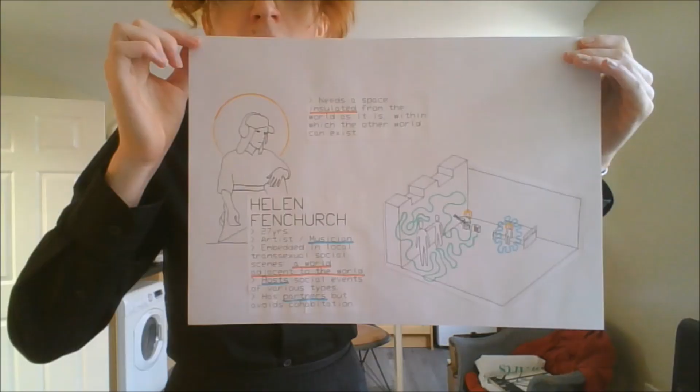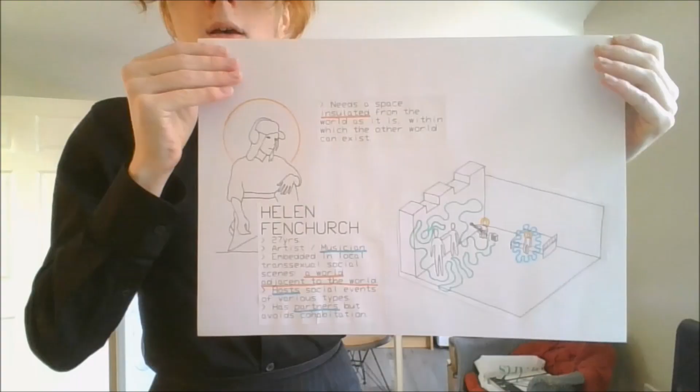It was to this end that I devised Helen Fenchurch, an amalgamation of cool transgender women that I know, and very probably including almost everyone seeing this footage. A 27-year-old musician. She needs her own space, and also needs enough room to host events. Considering the off-kilter nature of her social circles by conventional standards, a house for Helen Fenchurch needs a certain degree of insularity from the world around it, such that it provides an environment capable of hosting the alternative world within.

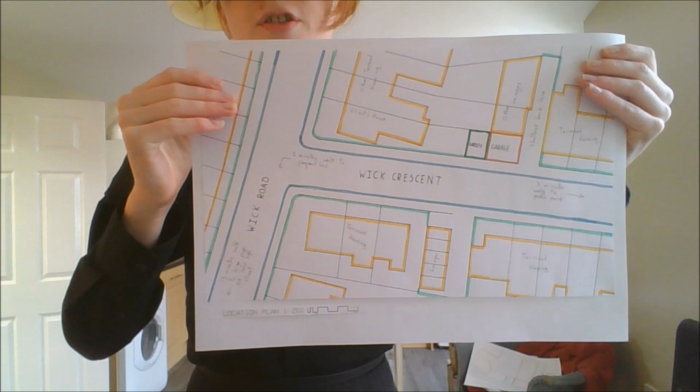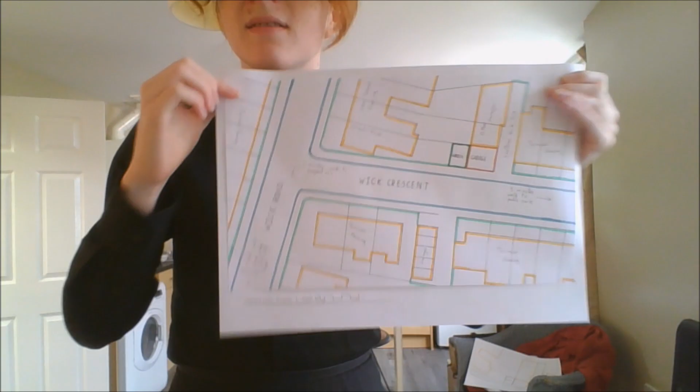The garage, shown in red, opens onto a back lane. It is also attached to a small area of garden, highlighted in dark green. It's 3 minutes walk to a park, 3 minutes walk to a bus stop, and from that bus stop, about half an hour in total to the centre of town. It's also 13 minutes walk to a large supermarket via a local high street with local shops. Rather pleasant.

A closer view of the site gives us a sense as to what's around it. The buildings directly adjacent to the garage are other garages. The other buildings, shown in yellow, are 2-storey terraced houses.

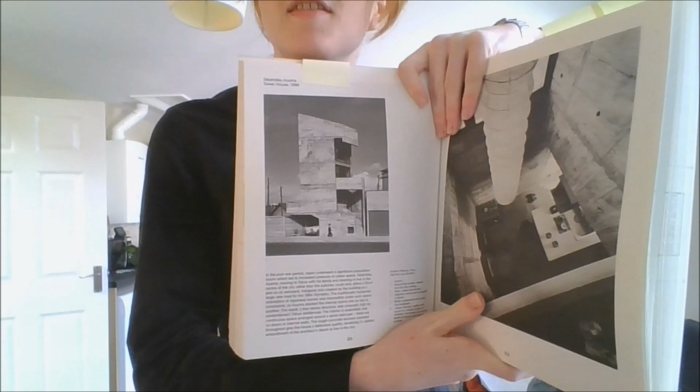With knowledge of the site, the user, and her needs, we must now hit the books and consider references. This is The Japanese House, Architecture and Life After 1945, a beloved tome of mine. Within this book we find Takamitsu Azuma's 1966 Tower House, Toyo Ito's 1976 White U, and Osamu Ishiyama's 1995 Light Coffin.

Tower House deals with its small site and overlooked surroundings by building upwards to create a sort of visual fortification against the city around it. White U looks only inwards with no external windows, onto a central corridor floored in dark earth, representing the grief of its planned occupant. Light Coffin is also a windowless space, with only skylights coming from above, with the appearance of a sort of distorted industrial shed. It was designed for a gay couple.

Besides these, I also considered Ted Cullinan's 1963 self-built house at 62 Camden Mews in London, the ground floor of which has high brick walls with clerestory windows above, that is, windows that are horizontal but above eye level, so you can only see the sky out of them. They let natural light in. This space, despite only being lit by clerestory windows and having no eye-level view outwards, was perfectly comfortable to stay within.

From these lessons, we can say that we can take advantage of our small site by increasing the height of our building, creating a level of visual fortification to prevent overlooking, and otherwise create a sort of insulated interior environment with the effect of something like fortification.

But on our small site, there isn't enough room for introspection towards a courtyard, as to put a courtyard through the middle of the building would leave a tiny donut of space around it. So, how can we create a courtyard without surrounding it?

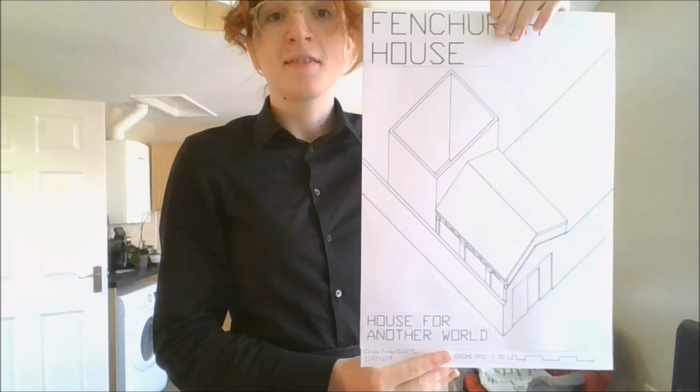Combining these lessons, we have Fenchurch House, or the house for another world. Here is the shaft, where the light comes down from above.

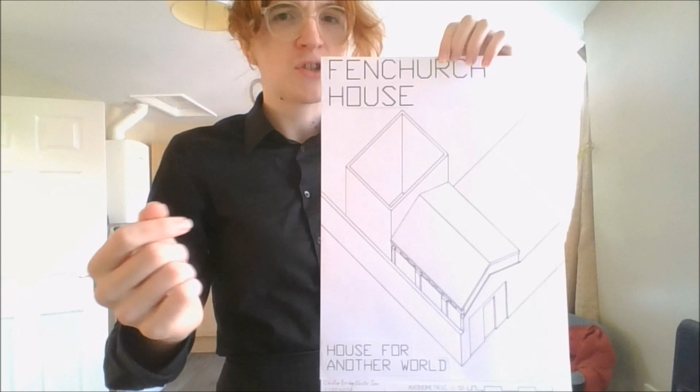Here is the garage itself. You can see the roof has been raised, with clerestory windows above the original bricks. These reinforcements, seen here and here, are original to the structure. They provide a decent visual of fortification or enclosure, so I decided to keep them.

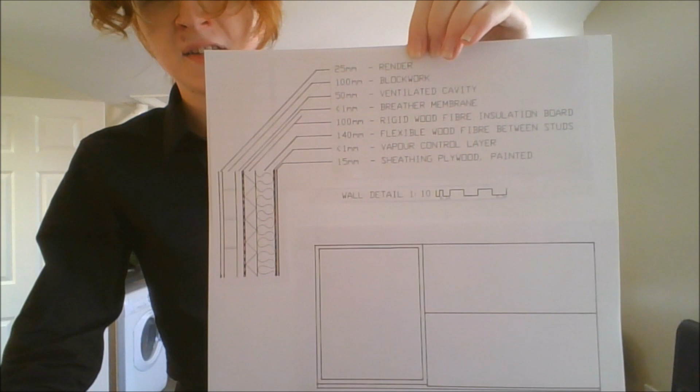This 1 to 10 detail shows how the original blockwork walls of the building were modified to make them highly efficient, a U value of 0.15, that's 0.3 lower than conventional building regulations currently mandate. All this construction would be done with timber, even the insulation being made of wood fibre. This sequesters carbon, making the building highly sustainable, a key component of the brief.

In the floor and roof plan, we can see that the garage door has been closed and replaced with a conventional one in the middle, and there is a single door at the rear as well, in the spot where a window used to be.

On the south side, we have the kitchen and the bathroom. The bathroom has been sized to permit it to qualify for Part M Category 1 visitable status, meaning it's comfortably usable by a visiting wheelchair user. There is also a shower on the south edge, with the drain indicated there.

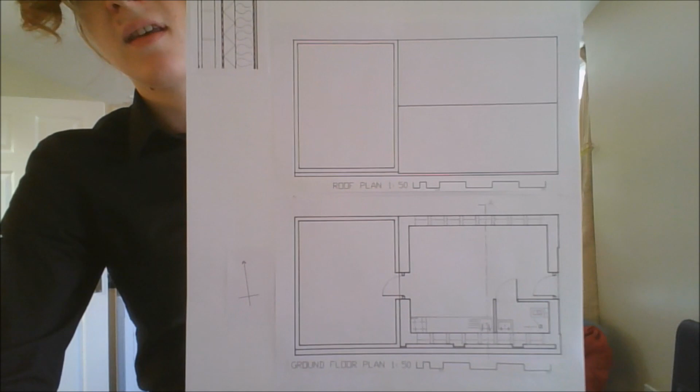The dotted lines here show the position of the clerestory windows on the north and south facades. Since the roof of the garage has been raised, even though there is another garage immediately to the north, you can have clerestory windows above it, so you have light going down both edges of your interior.

Very nice. Above it we have the roof plan, simply showing the shape of the original pitched roof, the garden wall to the south, and the high garden fence for the courtyard box.

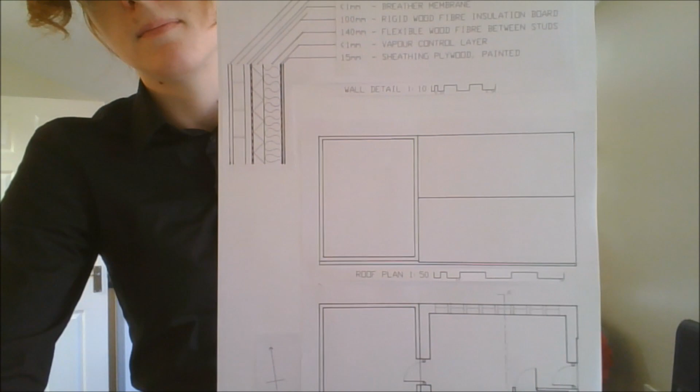Also take note of this dotted section line, AA, looking that way. We'll need that later. An elevation view from the south side indicates the height of the shaft and the original garage.

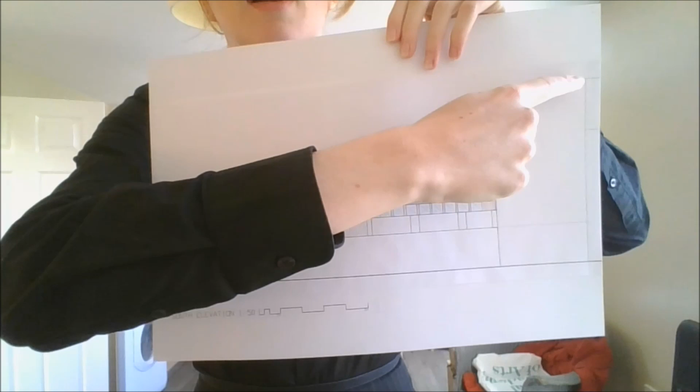Plus its raised roof and the little clerestory windows in a row through there. This here indicates the height and position of a neighbouring terraced house, so it's similar height but still quite a lot smaller. The original wall and the original wall of the garage are both covered in white render. There's dark stained timber here, dark tiled roofing, and the shaft is clad in panels of plywood, painted grey.

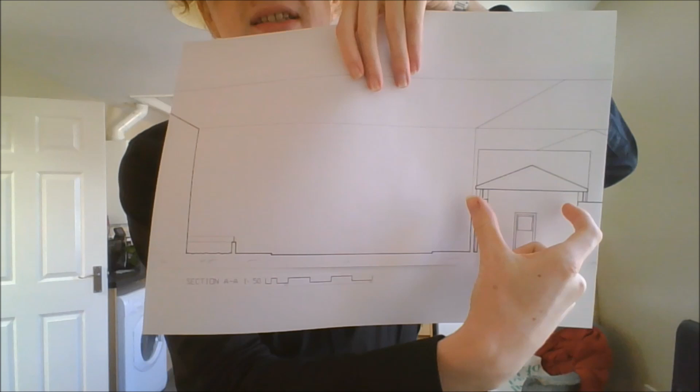This is the view indicated by the section line, sliced right through the kitchen sink and the interior. The interior is actually 3.2 metres high, nice and roomy, almost like a small chapel or church, with natural lighting windows on either side of the central space. We can see the width of the road opposite, the height of the houses, and the house behind.

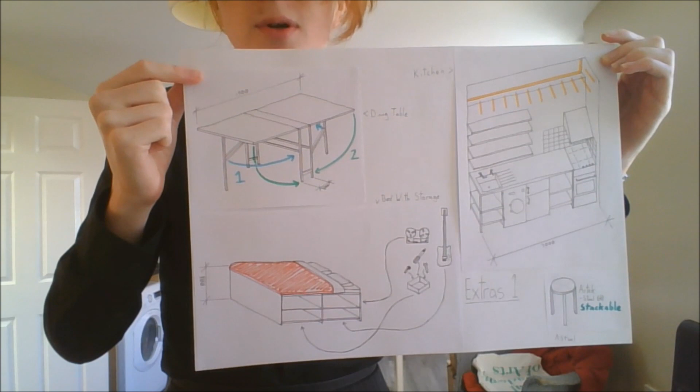Before we can show how the interior is occupied, we have to work out what it's occupied with. This is a bit of furniture design and kitchen design that we've done for the interior of the building. There's storage under the bed, a table that can fold away so you can host a dinner party for 6 without taking up too much room, a kitchen, iteration 2, and a stackable stool, also for the dining table.

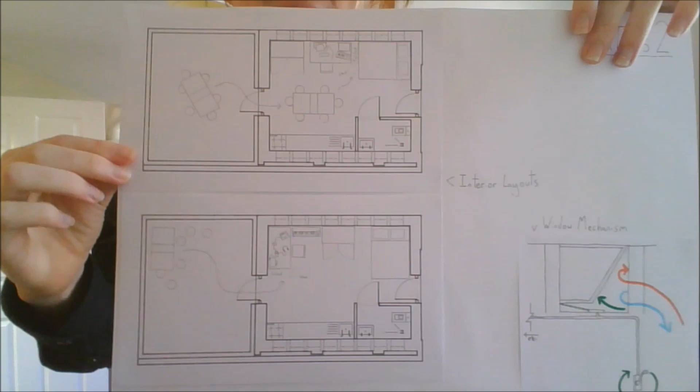These interior layouts show 2 different ways the interior could be set up, different positions of the bed, different places the table could go, and different places it and its stools could be stacked up. It's a lively little interior, all sorts of things can happen there.